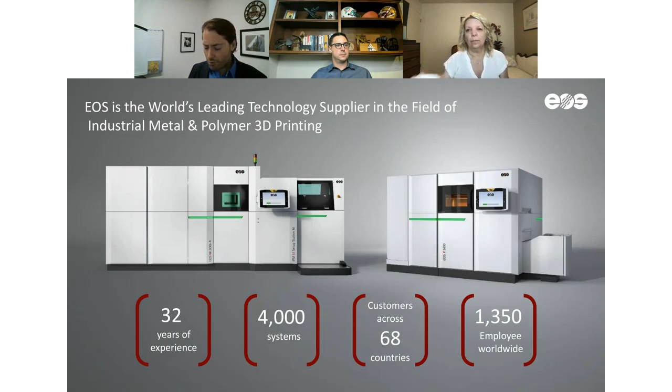Another thing I wanted to introduce to you today is our applications team, referred to as the Additive Minds team. Essentially, what our team called the Additive Minds is tasked with is understanding our customers and our partners, where they're at with the additive manufacturing technology, and where we can apply this technology to make a difference in your business. Our team is essentially focused on helping you to find your applications, develop these applications into something that fits in with your product portfolio or creates business value in some way, and ramping up production and helping you to certify that production.

And what this really means is often we work directly with you to understand your needs, helping to develop a tailored solution with our technology for your products, and helping to connect you with manufacturing sites such as Shapeways to help you understand how to transfer that into a manufacturing opportunity and a business opportunity. So we have a team purely dedicated to understanding your needs, taking our technology, and helping to apply that to walk through the entire process from conception to reality.

Just a really high level slide here. I wanted to walk through this, sorry, it doesn't seem to have the animations, but I wanted to take a half step back and introduce what laser sintering really is.

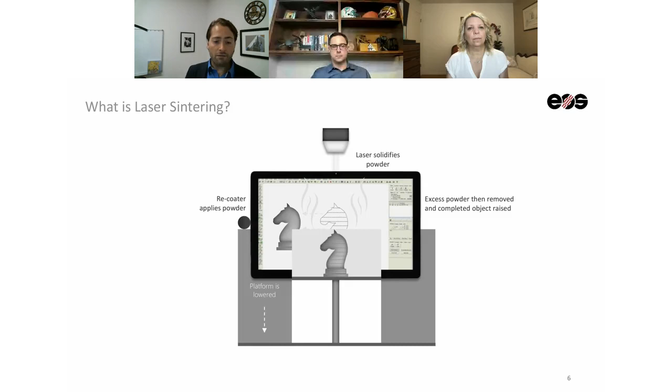What this really does in terms of creating value is it allows you to take a digital file and implement it in a way that gives you a huge design freedom toolbox. You can take most parts that are digital and used in a different manufacturing way, or design specifically for additive, and you just have a lot of design freedom, which I'll dive into more in the following slides.

What are some advantages of 3D printing?

Yeah, I think that's actually about right. So we're creating very, very fine layers. Essentially, most builds have thousands of layers, and we're able to build these very fine featured detail parts. For the most part, we use largely common engineering plastics that tend to translate well to applications already out there, maybe being used via other methods right now, such as molding or machining.

Interesting, so it looks like we have a good amount of answers. I tried to make it easy, but it does look like we have a few people with different ideas of the advantages of 3D printing. So Carrie, do you want to dive into some of those?

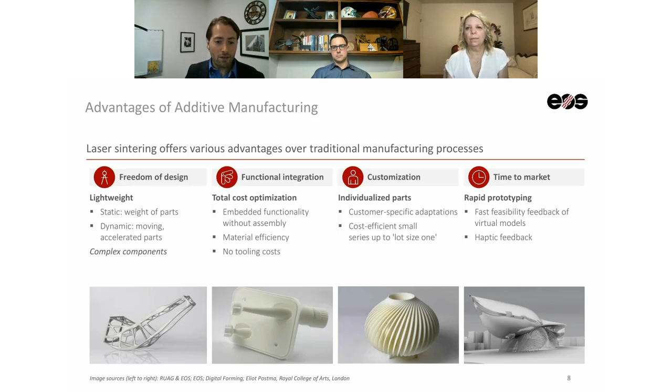Sorry, I jumped a slide. Really speeding up your new product introduction steps.

So the way I've broken up this discussion today is into a couple different areas, and I'm largely just going to touch on applications in each, because I think that's the easiest way to talk about the technologies. So if you look at the bottom left quadrant, one area I'll talk about is new product introduction, and how this technology is being used to redefine how products are developed.

The second, at the top left here, is how laser sintering is being used to consolidate products, and what that's really doing for companies and their business. Third is how laser sintering can be used to distribute your manufacturing and digitize your product portfolio, which ultimately leads to a lot of spare part reduction and faster turnaround times for manufacturing.

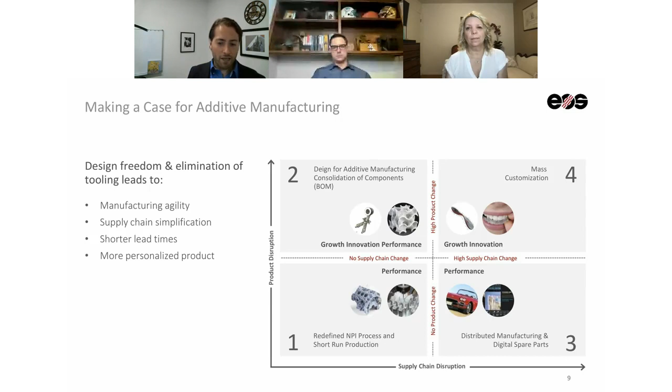The fourth one is mass customization. We have several really cool applications out there right now where people are starting to say, okay, how do we make our business more tuned to our users? How do we distribute this in a way that we're getting real feedback about our users, their shapes, their size, their needs, and printing and building those on demand for them?

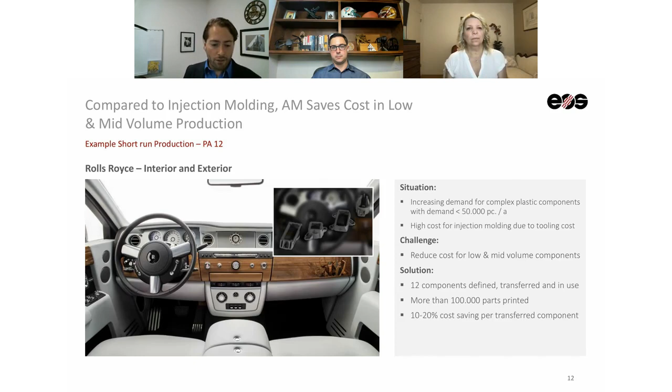Up front, they had an estimate. This was a short run of production, so we worked directly with them to identify the costs of making this traditionally, including all the input costs of molding, machining, and creating supply chains. We found we were able to identify 12 components based on the business case alone, and the speed to market of designing and building these saved them about 10 to 20% up front of building and using them for their limited-time automobile.

I want to also touch on how people are looking at this technology from a consolidation standpoint. This is a case study we partnered with a customer on, where they were making a gripper. It's part of an assembly line, and there's a unique profile to this gripper that lets it pick up parts and move them to a different manufacturing line. It has to have a really defined seal and a good hold on what it's trying to do, so there's the fastener, the hydraulic section, and then grippers on this as well.

A lot of components went into this traditionally, largely because all the piping and air handling had to be separate from the gripper structure. There were connectors, tubes, little spindles, things like that. We were able to redesign with them and work it down to 3 different parts, because all the functions they had to handle separately through hoses and connectors, we were able to build into one solid structure. This doesn't include the grippers, but it's the functional component of moving air, holding the grippers, and holding the actual rubber gripper parts.

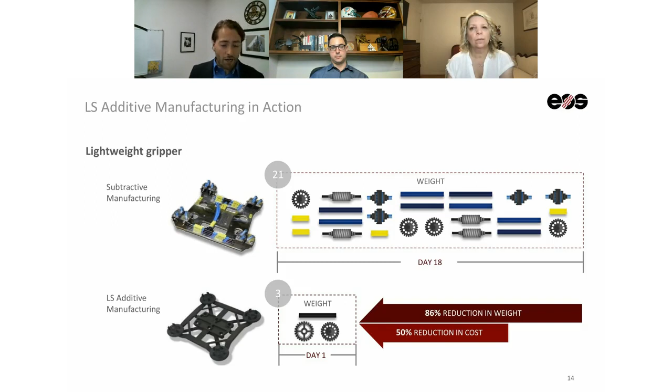We saw we were able to reduce the weight dramatically, which led to a reduction in cost, because it's a fraction of the material required to make the original part, a fraction of the time, a fraction of the lead time. That's a cool example of it not always being just a straightforward material or lead time savings — you can actually make a real difference in how many components you're using to make a functional part work, if you're open and willing to redesign.

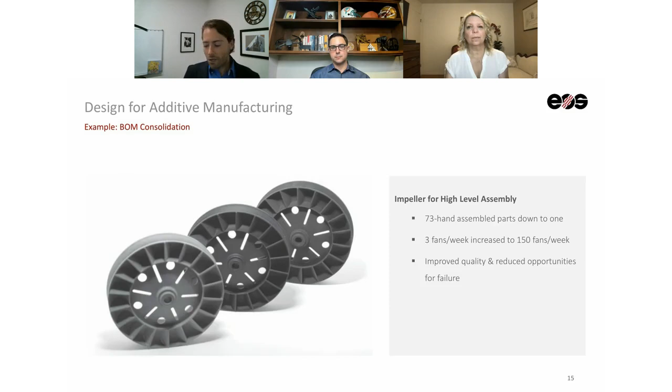This is a broader example, but the same things are happening in the impeller space, and with heat exchangers and other parts that traditionally require a lot of components coming together. This is an example with a partner where we reduced a 73-component impeller down to 1 component. The production speed improved dramatically, as well as the quality. The reduction in failure rates also went up, because if you take 73 components, they all have their own tolerance — imagine putting all those tolerance parts together. You get a lot of rejections and failures, but integrating that into one structure brings a lot of functional and cost advantages.

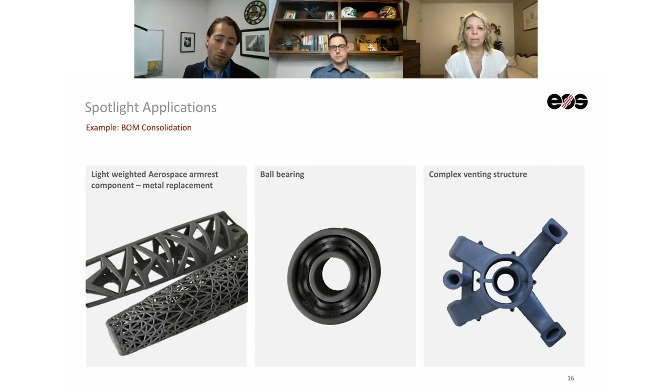So they're looking to us to help drive some of these metal replacements and lightweighting opportunities. Same thing with being able to print bearing structures creatively. And if you look at this venting structure, try to imagine making that any other way — it's a real venting structure meandering through the part so it can accomplish its venting while fitting into a really tight space. This was a custom structure for an application we worked on.

The first one is for the automotive parts.

Sure. How many were made and how well engineered was it compared to traditional manufacturing methods?

Yeah, that's a good question. So roughly 50,000 were made - so in the ballpark of what they expected, they did make.

When you say well engineered, there is some complexity to working with it. Let's use the automotive example - that's a highly regulated industry, driven by specifications. It's part of the consideration, especially if it's a company's first product going into this area. You have to understand for each part the performance specifications so you can translate that into a viable part. In this case, those weren't structural components to the car, and they also weren't under-the-hood parts, which reduced the performance specifications needed. So we really had to deal with requirements for venting, structure, casings and things like that - tough, but not the same level as something sitting next to the engine. There's an innate difference in most laser sintering polymers from what you'll see in the industry, and all of that needs to be taken into consideration when choosing your material and machine.

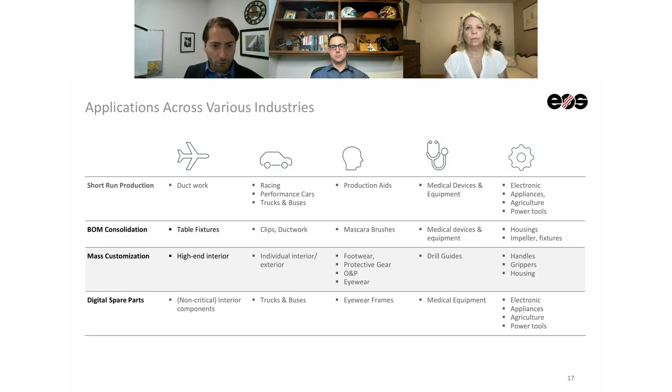Shocked by how you could take 78 parts and bring it down to one when we were talking about the slide back there. I think that really shows how the limitations of creating molds with complex geometries are why additive is catching up or will actually surpass traditional manufacturing with more of these complex parts - which is kind of a perfect segue into these custom shin guards.

Right, yeah, absolutely. So the next thing I wanted to talk about is more of a user-designed approach - kind of a mass customization approach to delivering a truly customized product to the end user. One example we've collaborated with several companies on is a shin guard.

We understand how to take a scan of a shin - many people understand that. But currently, what's being done is if a company takes a scan of a shin, they essentially mold a part used for that shin, applying general foam to it and trying the best they can to mold parts to someone's specific profile. What we did...

...is we worked to take a bit of a more compliant nylon, nylon 11, and create a unique lattice structure that's able to absorb a lot of the typical impacts you'll get from soccer balls, from other people's feet. The reason you're wearing a shin guard in the first place is you take a lot of errant kicks and things like that. So we designed a lattice specifically aimed at taking the abuse you see and need to guard against with a shin guard.

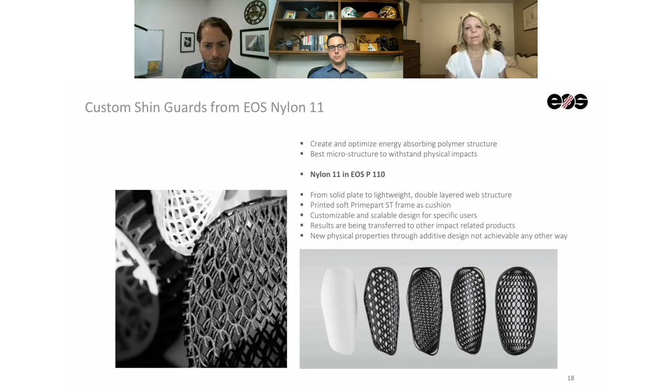I'm going to stick on this theme for a while because it's a really active area for us. Another effort we have ongoing is we work with a company called HEXR. HEXR is a leader in specialized helmets for bikers. They had a problem statement of: our customers want helmets that fit better, that perform better, and are more tailored to their profile.

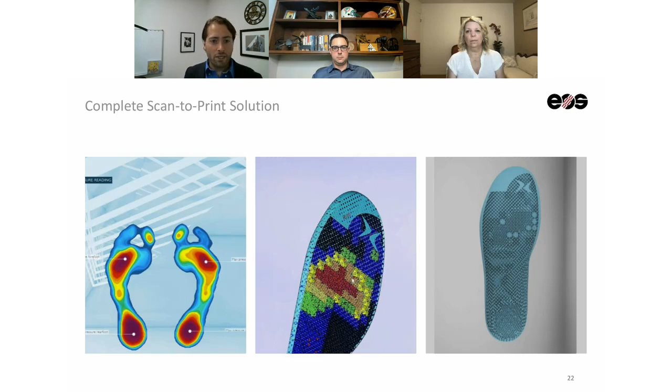Another example on the eyewear side is a company we've worked with called Fitzframes. Each of the founders had children and realized they were buying new glasses every single year, if not earlier, for their kids. It's a major pain point of waste and rework.

So they wanted to create a seamless way for kids to pick their own eyeglasses, choose that customization, and have them delivered really quickly. What they have is essentially a subscription-based model running EOS machines, with an app where a child can look at his or her own face, scroll through glasses, and pick their color, size, and style. It goes straight to the printers, gets printed, dyed, and fit for lenses all within a few days, arriving at their door.

So they can avoid a lot of the traditional processes involved. And since it's a subscription-based model, children can basically swap out glasses as their face changes, as their needs change, and things like that. It's another example of how we're revolutionizing the mass customization market with our customers.

One final example would be the medical segment of custom orthoses, with some of our partners actually printing the entire orthotic for users with real medical needs. This has been able to accomplish similar things - weight is a real problem on orthotics, so carrying around a really heavy orthotic, while it helps, can also hurt from a balance standpoint.

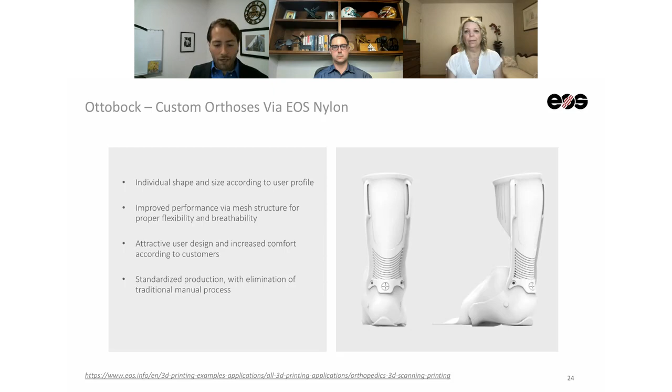And a mobility standpoint. By being able to create these open structures and user-designed structures, we're enabling a much faster recovery time, a much more user-focused production method that's really generating medical devices tailored for our customers.

The last application I wanted to touch on is the concept of spare parts and inventory. From a business case standpoint, especially for products that have been in the market a while, one pain point many companies have is how to manage spare parts for machines or equipment in the field. Essentially, the way they manage that is just having piles of it in warehouses, because it's really difficult to project how many parts will be needed.

And if you're under on that, then you really have an issue with your customers and your lead times. So it's really common in the industry for folks to be burning a lot of their internal capital on having these large inventories. But if you think about the ability to take a digital file...

Having what's referred to as a digital twin for these parts, keep that on file, you can then have a number of machines on standby ready to print on demand the parts customers need to keep their equipment up and running. So there's really a very strong business case for converting as many aging parts, or parts that will be your replaceable parts for new products, into digital files, so you can have them when needed without massive warehouses full of aging parts and inventories just sitting there. So we've worked with a lot of customers to look through their product portfolio.

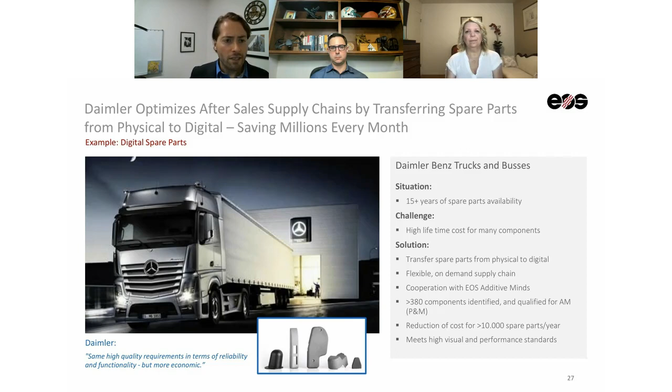One company we've done this with successfully is Daimler, which has a company called EvoBus. We went through all of their components, identified over 380, and were able to digitally convert these so their inventory went way down, while they're still able to meet the same needs of keeping their fleet up and running and keeping customers moving. Some of these parts we designed with them even mimic leather interiors, so it's a seamless replacement of the original parts.

So that, from a high level, covers some of the applications I wanted to deep dive on. As we get towards the end of the talk, I want to go a little into the material side of things and how EOS manages our materials and products, and give a high level overview of that.

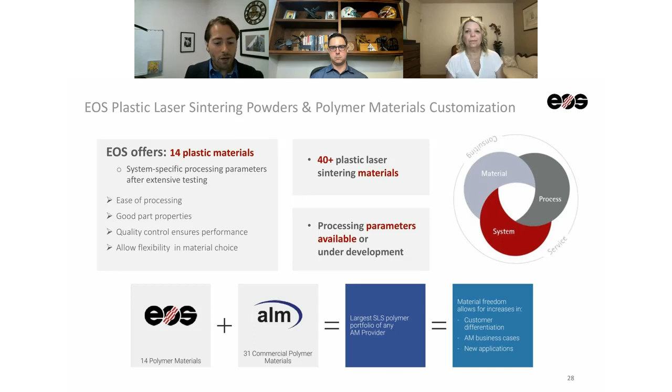In general, EOS has 14 plastic materials that we currently offer on our printers, and Shapeways runs many of these materials. We also have a subset of EOS called ALM, Advanced Laser Materials, which is more toward customization of materials for specific applications. So EOS rolls out standard materials, while ALM works directly with customers to say, you have specific ductwork in an aircraft that needs to be ESD, needs to be tolerant of these things - well, we then often take that on as a potential custom development project. So we have the ability to support our platform materials while also developing custom materials.

Here's a list of all our materials, which you can find on our website. A lot of these are nylon based, like I've been discussing. Nylon 12 is our highest volume material on the market right now, and Nylon 11 is also very popular for applications that require more dynamic mechanical strain and more compliance in some ways. We also have materials that are carbon fiber filled and aluminum filled, which improves the ability to dissipate heat - some short run production molding applications use aluminum filled materials.

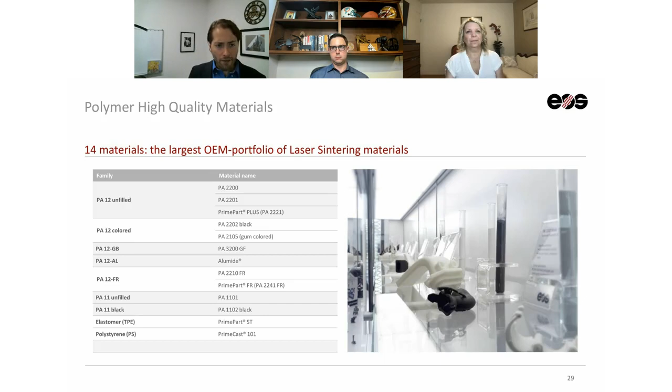We also have a number of elastomers - TPUs and TPEs that we've employed. The insole application I discussed a couple slides ago actually uses a soft material, which was able to create the kind of custom soft feel that the users needed.

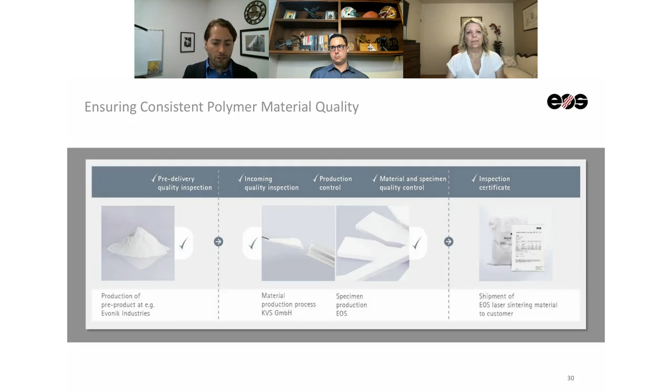We take very seriously managing the quality of our powders. We have suppliers that comply with our quality standards, and we do our own quality checks before we send material out, including mechanical testing in our printers before sending any material to customers. All of these have certificates backing them, and all powder is managed quality-wise at EOS through building and running witness coupons and maintaining a quality powder process.

So going back to our ability to create custom materials through Advanced Laser Materials, which is a subset of EOS, what we really do is take traditional Nylon 11 or Nylon 12 as an example. An automotive customer may say: we need something with a really high heat deflection temperature, it needs to be flame retardant because it's going to be in a really hot environment, and it needs to withstand some of these dynamic mechanical strains it's going to undergo.

So we'll then go to our portfolio of polymer materials, and we have a large range of fill materials to look to, such as glass fibers, mineral fibers, and carbon fibers, which can allow us to make materials conductive or ESD. We essentially use that toolbox to develop a custom material if the business case and application calls for it. So a large part of our business is helping identify the specific needs of our customers for an application - if we don't have a current material that meets that, we often can make it.

And often we'll help enable our customers by working with Shapeways to say, okay, we have a material, we have a production process. Shapeways can help fill that production need with our material, and we can have a cradle-to-grave solution in terms of conception to specified material and process to a production platform.

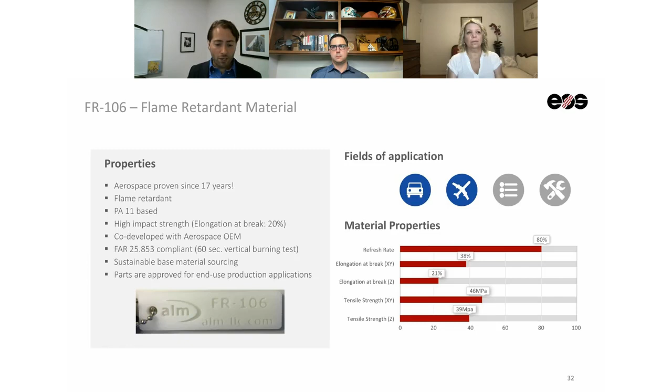One is FR106. This is a material we actually developed with an aerospace OEM that is currently on many aircraft, as ductwork. This is a nylon 11 material that has flame retardant additives, which makes it compliant with a lot of FAA regulations for flame retardants, so we were able to take a need that they gave us and create a custom material that is now actually on many of the aircraft that are in the skies right now.

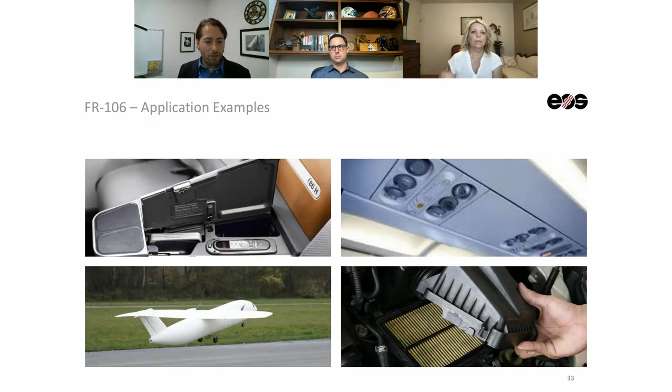These are used not just for ductwork, but for some casings and air vent structures within an airplane. It's even being used in some automotive interiors, which have somewhat similar flame retardant requirements in cabin applications.

There's another one I wanted to highlight. It's a high performance nylon 11 with carbon filled structures, specifically designed to resist impact and reduce fracture. This material has very high isotropic properties, meaning in the X and Y, it's also very similar in the Z direction property-wise.

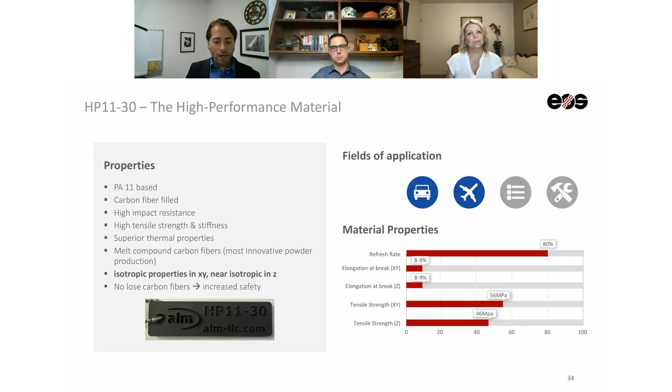That's a common challenge in 3D printing. In your print direction, your properties can often be different than outside of your print direction. This material was designed to combat that, giving you very uniform properties. It's used in a lot of racing applications, custom cars, and also regular commercial cars, with a couple of applications in there.

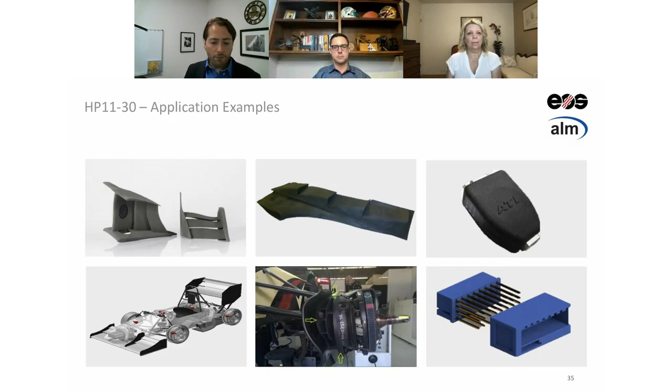The final material I wanted to give an example of is one we've taken - a nylon 12 - and we've added glass-filled beads, basically glass beads, into the structure and some other additives to result in a very lightweight structure that retains stiffness and strength.

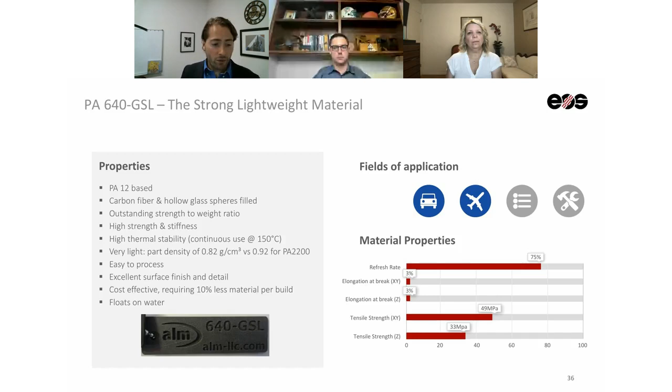If you go back in the presentation, I was talking about lightweighting structures, replacing metal, replacing current components to really improve efficiency and weight. Well, this is one of those materials doing that by creating a reduction in mass while retaining strength. This is being used in drone applications, bike applications, and different sports-related applications that require lightweight structures.

So with that, I wanted to wrap up, and I appreciate your time and attention. What I really wanted to say is we at EOS have the ability to take you from...

Conceptualizing a new product, looking at your business case, walking you through that process. And with strong partners like Shapeways, we're not just able to sell you a material or a machine. We're able to help you develop that process and really turn that into a supported production scenario with Shapeways to meet your production needs.

So yeah, one of the applications you talked about, actually, Fitzframes. I love that story because it was one of those interesting stories of how a customer started off identifying what their problem was, what they wanted to figure out while creating the glasses for children, and actually worked with Shapeways for all the early stage prototyping and conceptually building out the business, then eventually, once they ramped up and had the business going, came over to EOS and bought machines. Again, kind of one of those wonderful symbiotic relationships you saw come out of this whole process.